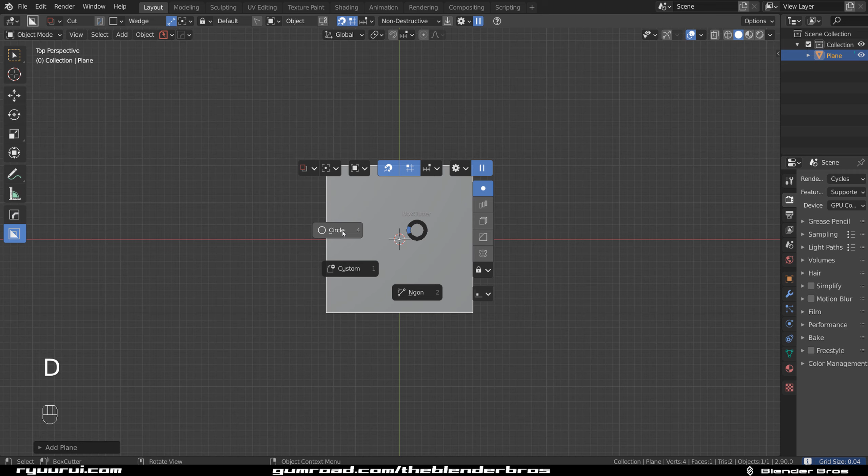So let's grab a circle and turn on this snapping tool here. Let's make sure we're in object mode, and then we can simply draw a circle. With shift and scroll you can adjust number of verts, and if that doesn't work, you need to enable shift scroll adjust for the circle. By the way, I'd suggest enabling those two as well, quite useful. Anyway, let's go here and see what we got.

Let's symmetrize this across, so Alt X and D symmetry, and let's combine these two faces and symmetrize it again and combine these two, and then we're done.

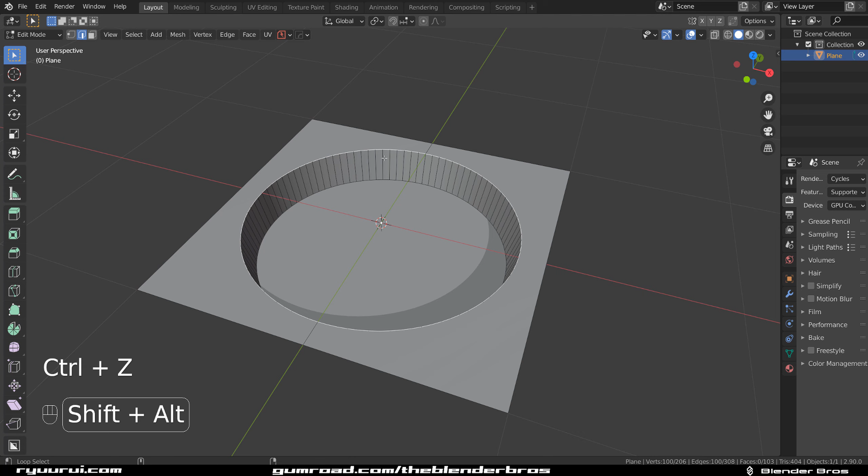Now let's extrude it down and scale it just a little bit, and we're gonna chamfer this because that's where it's hidden. Let's mark it sharp and chamfer this. We can't do this, so let's clean it up, there were some verts remaining from the previous edges. There we go.

That looks nice. Select this face, Q, and curve extract, and let's go up.

In fact, you know what, change of plans. What we're gonna do is create a blade. So deselect everything, go to view mode, and let's draw a blade here with an N-gon, like this. Hold Control - if the snap gives you grief, just turn it off and do it again. Hold Control and do something like this, and then we're going to create a shape.

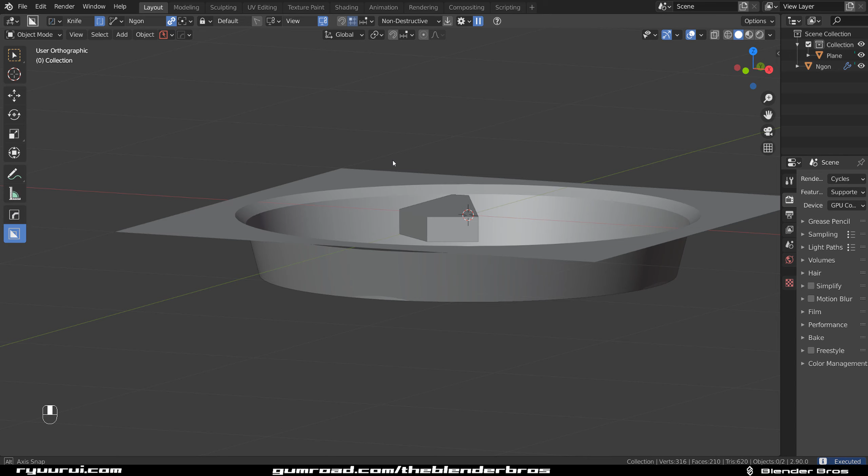Alright, let me see this. Let me move this a little bit further away here. And what we're going to do, in fact, you know what, let's extend this face out here. So in orthographic mode, just extend it out here.

Let's select this one, Shift D, P, and let's grab this and select over all of them, F, and then let's extrude it out. So somewhere here, Q, select this one and slash, and we can delete this. So let's remove this one.

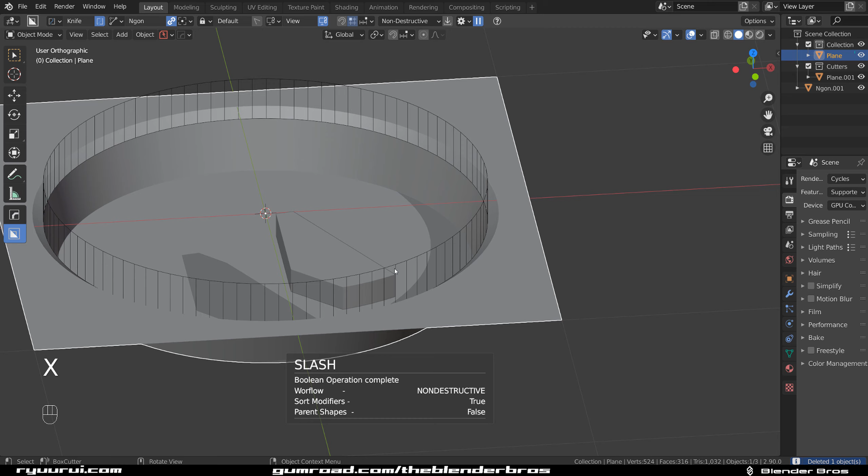Let's see here, we're looking good, so we can sharpen it. Now this is way too thick, right? So we gotta do something like that. And also we're gonna bend it.

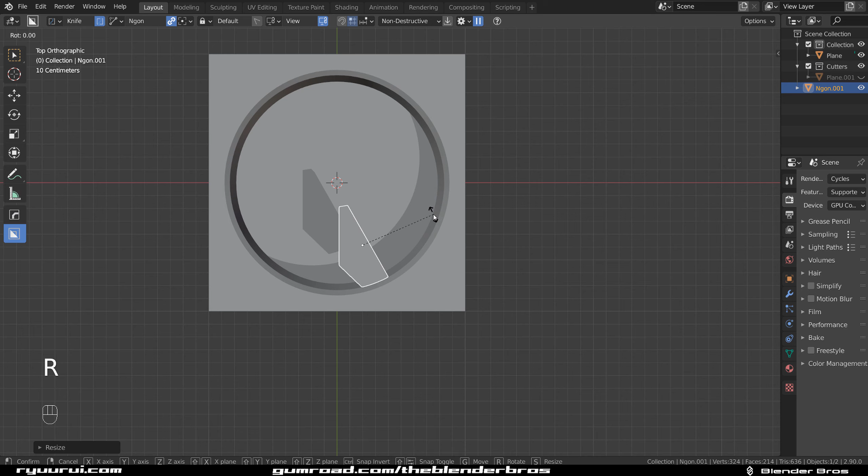So here's what we're gonna do. Let's rotate it on X by 90, apply the rotation, right? Let's go to Loco, go to mesh tools and dice, and press Z, Z and X, and this maybe is okay.

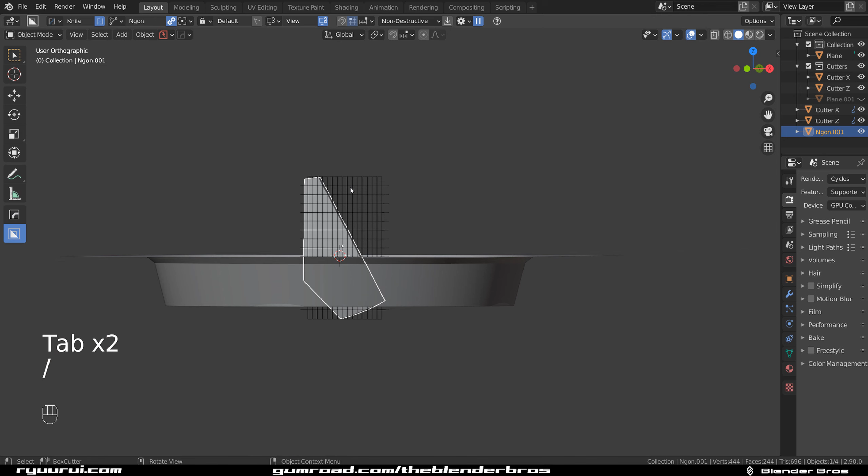Hold Shift and click - this will actually create a mesh out of dice, which you can use to do a knife slice at any angle you want. So if you wanted to slice or dice this not straight, but rotated a little bit, you can do it because you simply rotate the knives, okay? You align them with the geo.

So let's go to Loco again, select both of them, make it bigger, align them with the geo the way you want, which is important, and then your dice - oops, not this one - knife. And there you go, you can create a really nice quad mesh, or close to it, with this method.

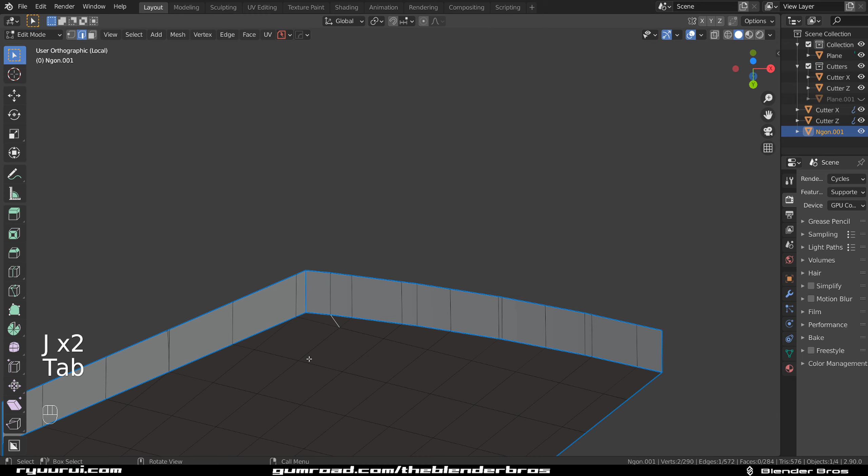Let's remove these because this edge is a mess here. We can remove this, and also this is way too close, meaning this will need to move. So move this one in here. Quite frankly, this one I would do something like this probably, and remove this one from here. And we can remove these - that's junk. I'm not concerned about the other side because I'm not going to be seeing that, but this should do.

Now what we could do is run the chamfer across this whole shape, or in fact not across the whole shape, but up to here, and chamfer this. But we're gonna get some grief from these edges here, so we will need to fix it first.

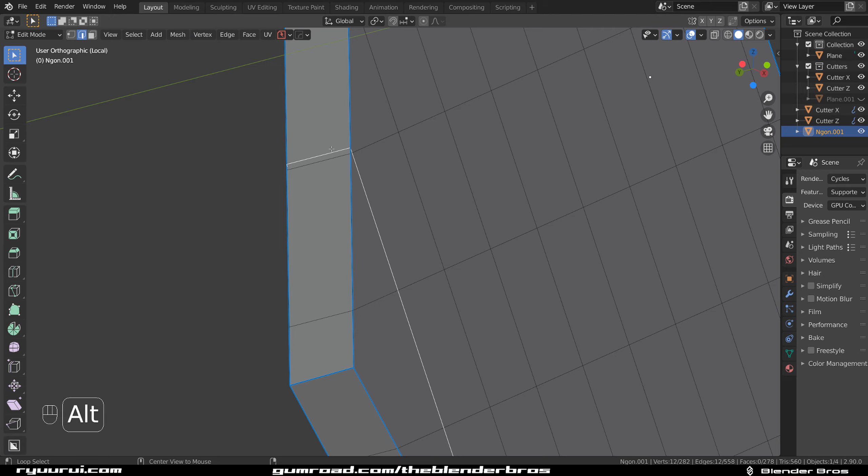Well, we technically could fix this, you know. We could even remove this, to be honest, and enjoy our life. So now it should work. And if it doesn't, we can always skip the bevel - I mean chamfer, that's not that important in this case. But you know, a small one would be nice.

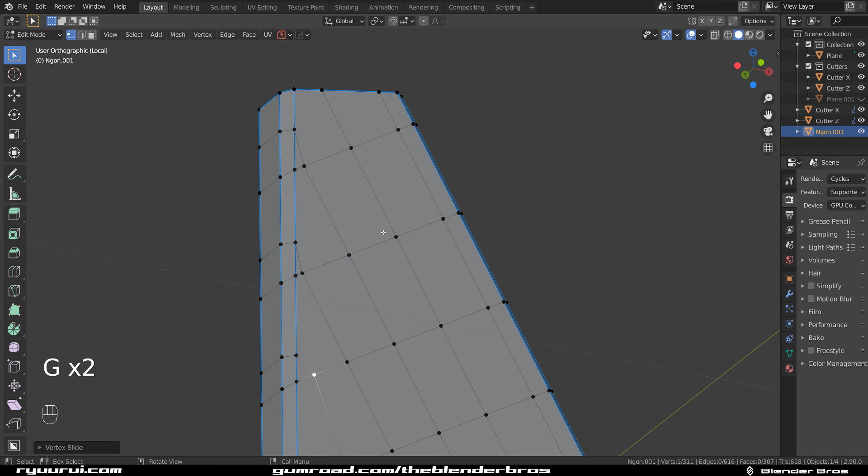How are we looking? Well, we're not looking too bad. Could be worse, could be worse. Well, this is pretty bad, but we can fix this. There you go. And this is pretty bad too, we can fix this. This one is a bit too close - too close for comfort. Okay, so we're good now.

Now we go into the formats. We go to Hard Ops and just click on this one. And what's going on here?

Sharpen got removed, there you go. Control and right click, and simply increase the angle a little bit. And there you go, that's that.

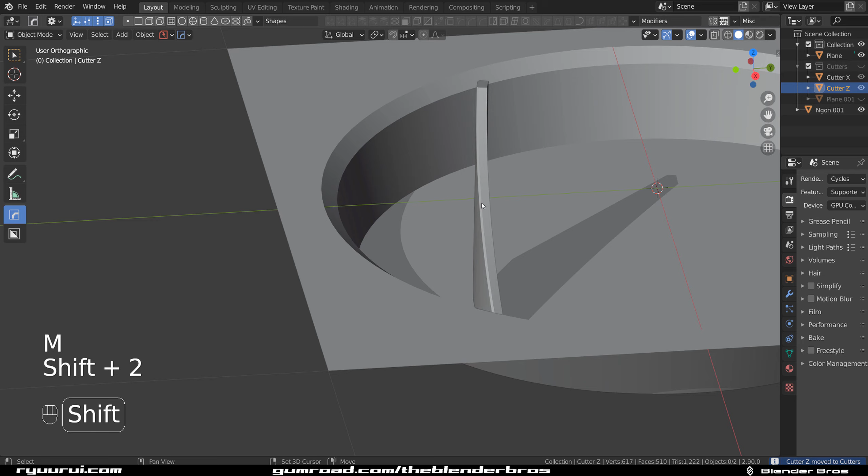So let's hide this, M to cutters, and shift 2 to hide the cutters. Let's now apply this to the mesh, RX minus 90, and apply the rotation.

And then we're going to control click on this array, right click on the array here, and increase the count to something like this. Now we're gonna have to rotate it.

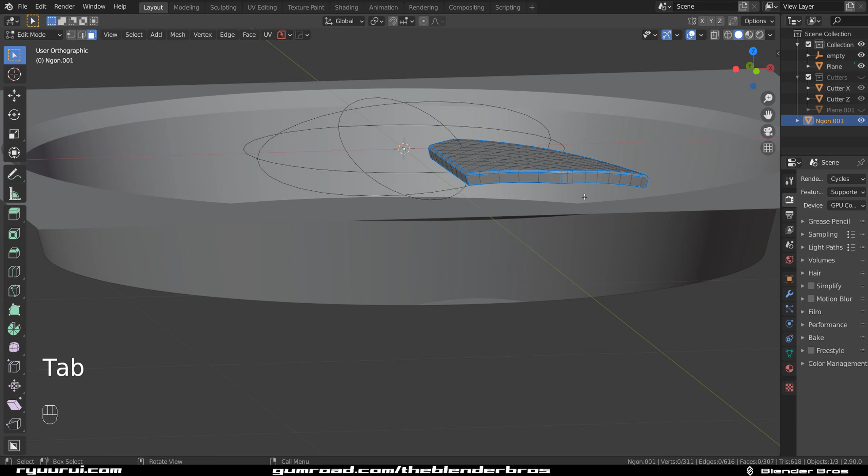Let's just move it this way, and then we're gonna rotate it this way, correct? A bit more. That's too much. There we go. That looks pretty cool, that's rotated, right?

So now I actually want to cut it, so it's gonna be a headache to do it with an array on. So I'm just gonna remove it and just array it again. And let's grab a knife, a bit gun is fine, and simply let's just slice this a bit.

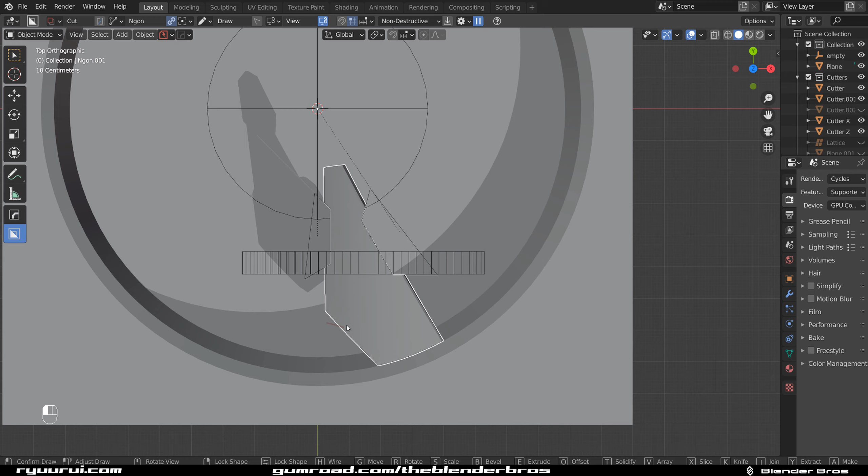Okay, so that didn't go through. There you go, this should work.

And not this one, let's just sharpen this and bevel. And you gotta be careful with bevel here because, you know, this is quite a sensitive geo.

So let's remove this one, this is from the array, and do it again. So go to array and let's just array this again.

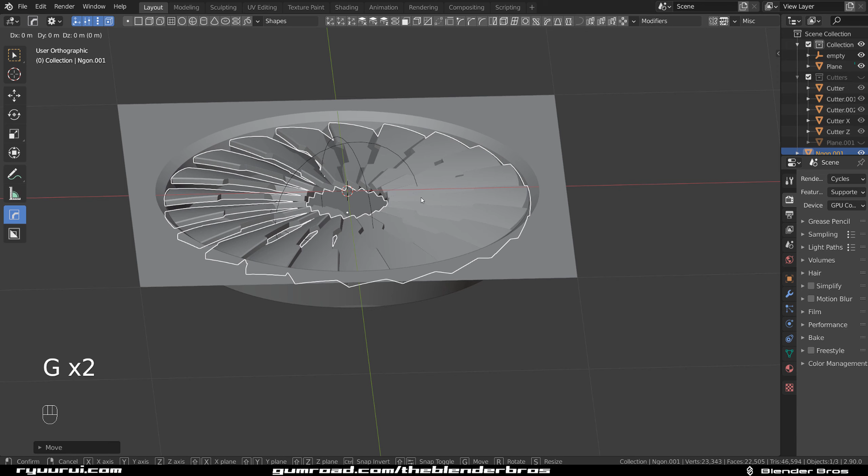There you go, and now apply. So everything is fine, so we can drop it a bit down, yeah, here. In fact, a bit lower. Somewhere here, that'll do.

And now we're going to select the face in the bottom and extrude it out. And we're going to grab this loop and drop it in here, and then in face mode, extrude macro, and insert it inside. So it goes like this, and grab this edge here and

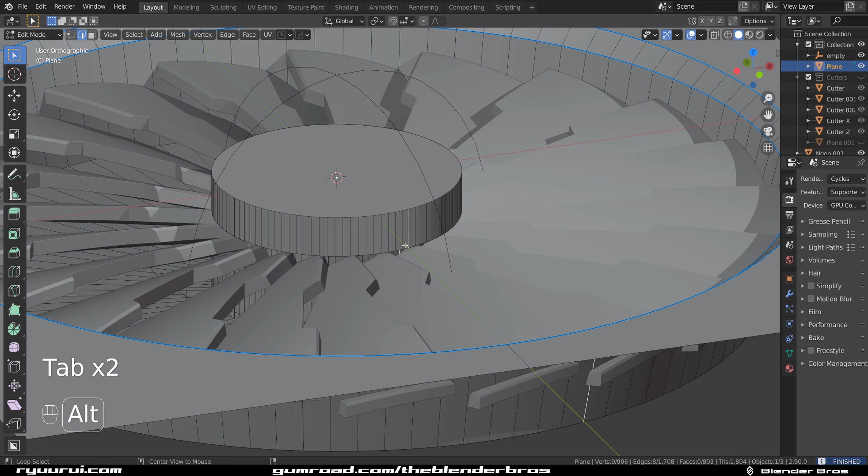chamfer it, and in fact we're going to run sharpen. So control shift click on sharpen to recalculate it, and that should do the trick.

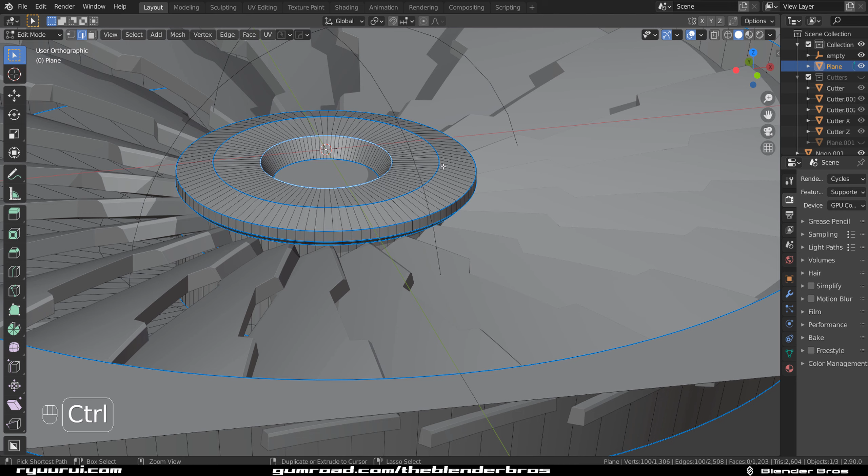So GZ, maybe something like this, and maybe we can do this, insert it and extrude it down, scale it, see if it's gonna be any better. Yeah, that's a little bit better, a bit better of a design.

So now we need some bevel on this one, right? So bevel this. It's a bit too crazy, so let's go with 9 segments. You want subtle bevels on decals, but that's quite important. Also, I think the bevel is overshooting here, or maybe it's not catching. So what we're gonna do is switch bevel from angle to weight, and done.

So that's that, and this one needs a bevel as well. This one does have a bevel. Okay, it's cool, it's a little bit too big, so I'm just gonna make it a bit smaller, yeah? Something like that.

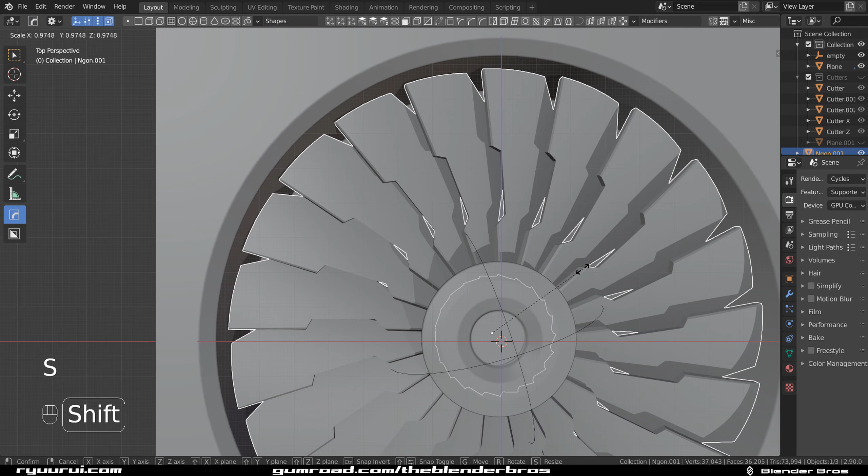Perfect, so let's save it. Now we need some kind of a, you know, it's actually still too big. There you go. We need some kind of a net or whatever on top.

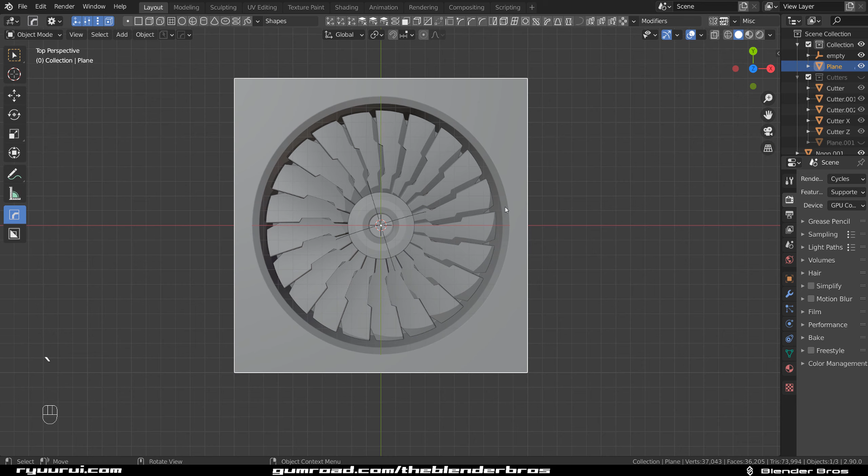So what we're gonna do is grab this circle, this one, right? And we're gonna go to hard ops and click on. We could grab a honeycomb from...

You know what we're gonna do? We're gonna go to edit and preferences and go to extra, not here, add-ons, extra mesh tools, extra mesh objects, this one.

And if I remember correctly, there should be a honeycomb somewhere here. Diamonds, extras, honeycomb, there we go.

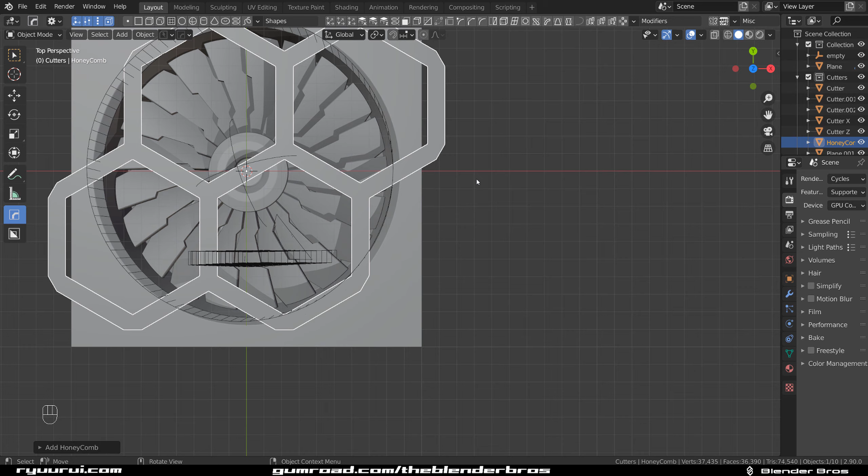So make it smaller, like this, or even smaller, and bring it in here.

And we're going to array this, right? So array this on this axis, right? So let's see. Okay.

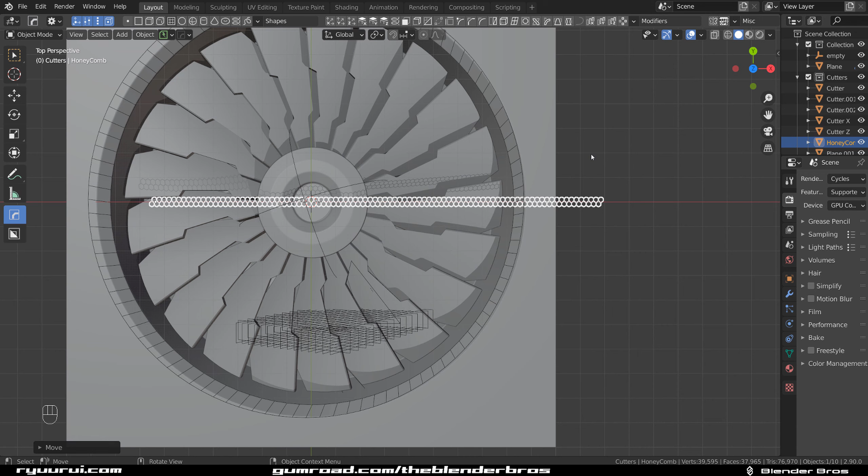Move it in here, and we're also gonna array this on the other axis. So press A to add another array, and you can add a second array with hard ops. So array this. Come on, what's going on here?

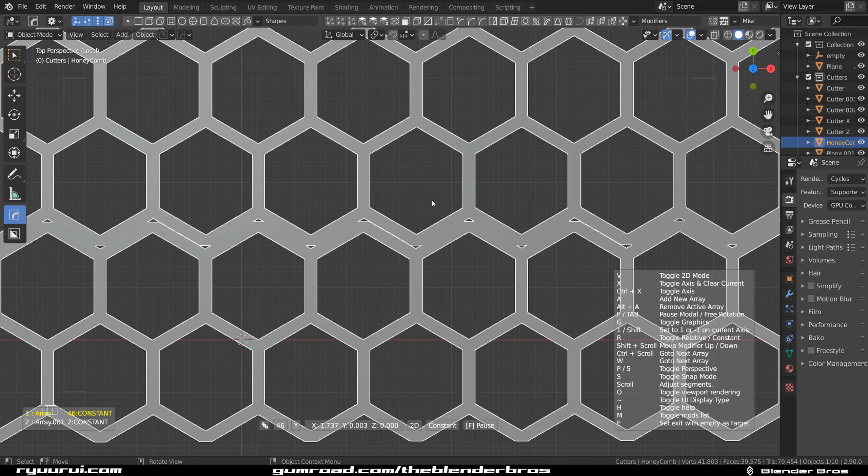One more time, this is confusing. Add a second array and X. There we go, that's what I want. Perfect, and now we're going to array this on this axis, right?

So make it big, and bring it back, and make it a bit bigger. And use this one to slice it. So boolean and slash, and delete it. Not delete it, wait a minute. Did it slash it? Oh, I think I need to, wait a minute.

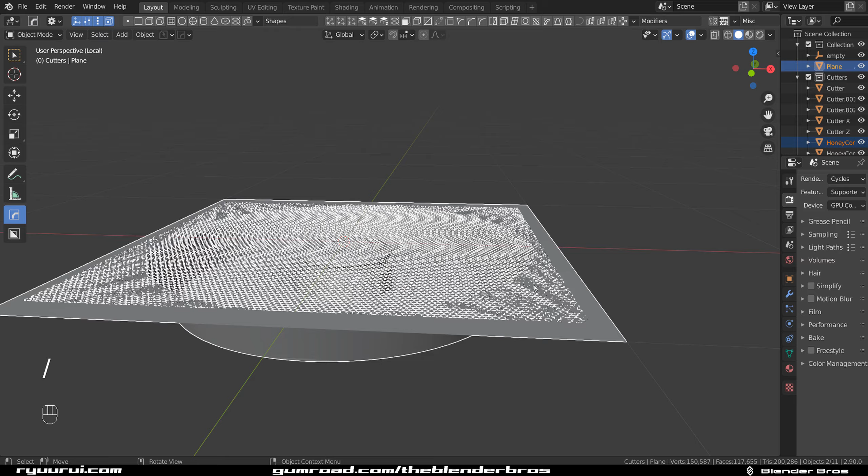Let's grab this one and remove the boolean, and let's apply all the arrays, and then let's slice it, okay? So let's grab this one. That should slice it, wait a minute. There you go, boolean and slash. There we go, now you're talking. And we're going to sharpen this, so apply the boolean.

Then clean it with MACHIN3, so just press 3, there you go. And we're gonna make it a bit bigger so it fits. Shift 2 to hide the cutters. Oh wait a minute, this went to cutters, didn't it? So we need to bring it back to the main collection.

There we go, make it a bit bigger. So, origin to geometry, and make it bigger and sink it in somewhere here. I'm going to select this geo, and what we're gonna do is, where is it?

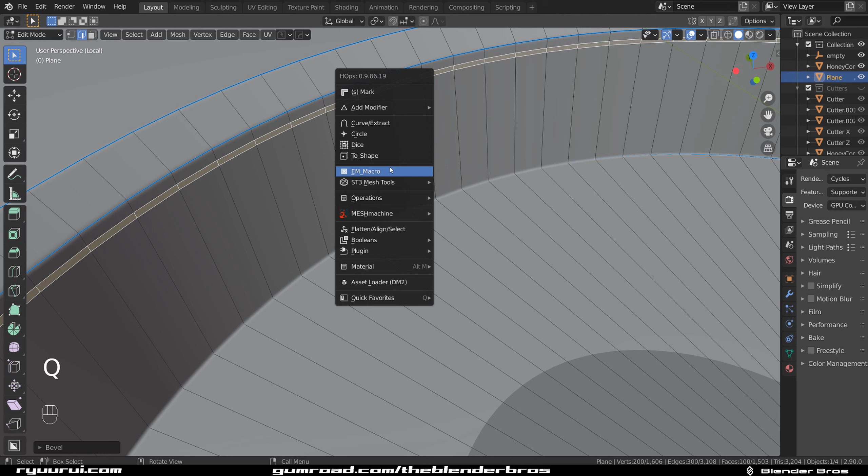Right, grab a loop and put it in here, and Control B and split it, and let's run EM Macro on this and move it a little bit up. One more time, move this a little bit higher and then split it. Okay, and then EM Macro and move it outside, yeah, like this.

In fact this could be a bit thicker, like this. EM Macro and outside, perfect. And now let's grab this thing, and where is it, move it a bit lower, right? Somewhere here, and we need to solidify this properly.

There you go, how are we looking? Yeah, we're looking pretty sexy. We're looking pretty sexy. So this could be a bit lower because it's clipping, you see. I don't want it to clip.

If your PC struggles, just, you know, you can skip this step. But I like bevels on my decals. I mean, you could just use some other kind of mesh on top of it. There you go.

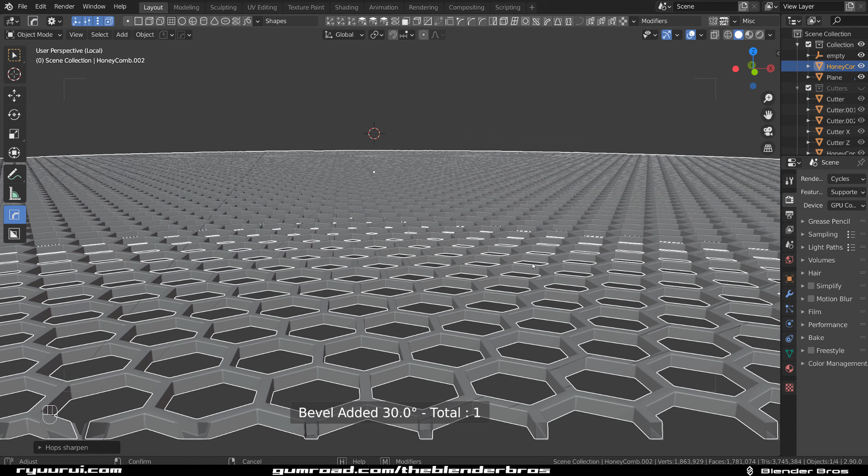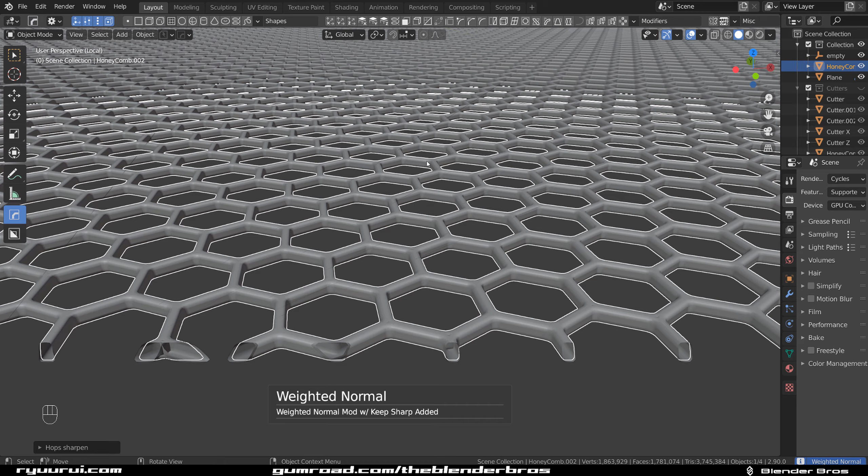So let's see, I think it looks pretty decent. Let's make it 0.001. And that will do. And weighted normals, and we're gonna switch it to 100. Affect it, and we should be good.

Okay, and then let's save this because reasons, and let's see how we're looking. Yeah, we're looking pretty good. We're looking pretty good. So now what we need is some, you know, outer edge or something.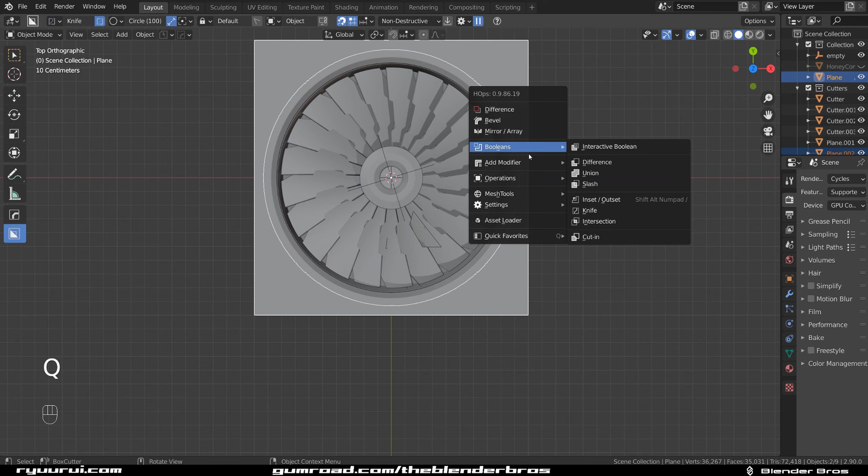Let's grab this one, Shift D, make it a bit bigger, and select this one and knife. Select this geo, and let's select this edge only and split it like this, and easy, and drop it down, and then switch it to individual origins, and yeah, just gonna work. Not really.

Okay, so what we're gonna do is select this edge outside and scale it in orthographic. All right, and select this one and scale it out. There you go.

That's better. Now we're going to select both of these and chamfer them. Sharpen. There we go, that's cool. What's going on here? Ah.

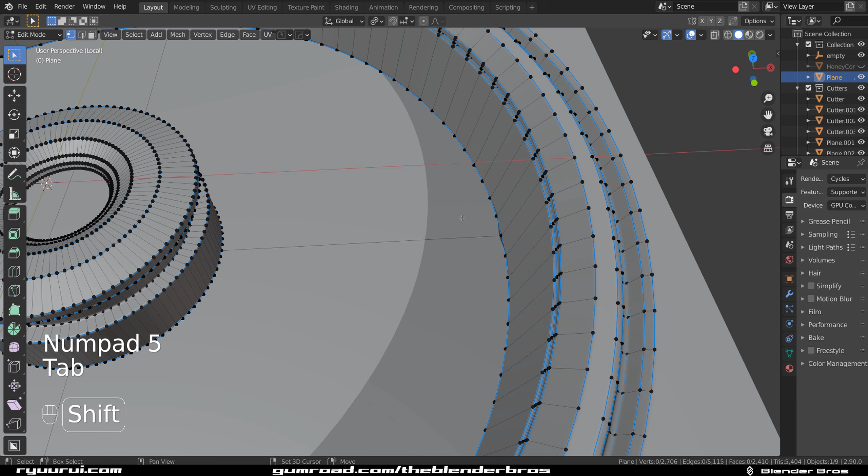Well, we can actually symmetrize it. Yeah, I'm gonna symmetrize it. So Alt-Z and symmetry, and boom. And this should work. What's going on here? Some disaster. Press 3 to clean it with MeshTools and we're done.

Okay, how are we looking? We're looking pretty good. Alt-H to unhide it. Shift 2 to hide the cutters, and let's see how we're looking. Yeah, we're looking pretty good. We're looking pretty good.

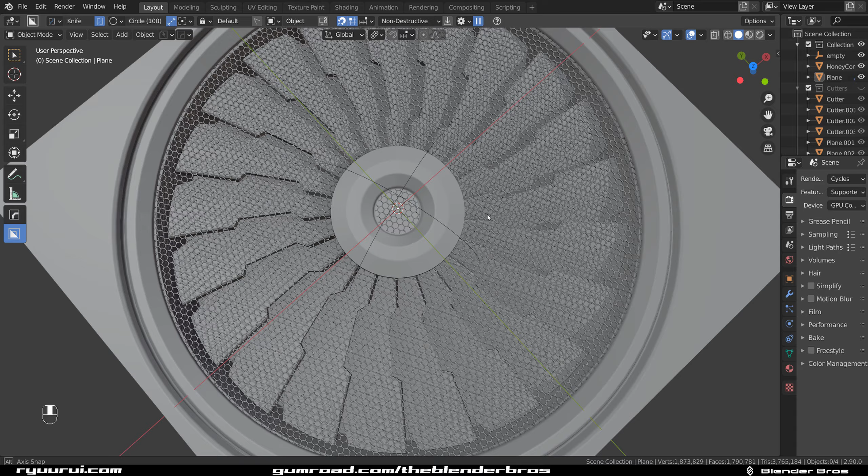So I think this could do, but you know, we could just add some more stuff in here. For example, let's grab a plane and rotate it and subdivide it.

And just, you know, bend it a bit and apply the rotation. And let's curve it a bit more. And let's bring it here and see this curvature.

Let's actually add some solidification so you can see what we're doing. So modifier, solidify, there we go. And now right click on this bend and, you know, bend it properly like this, right?

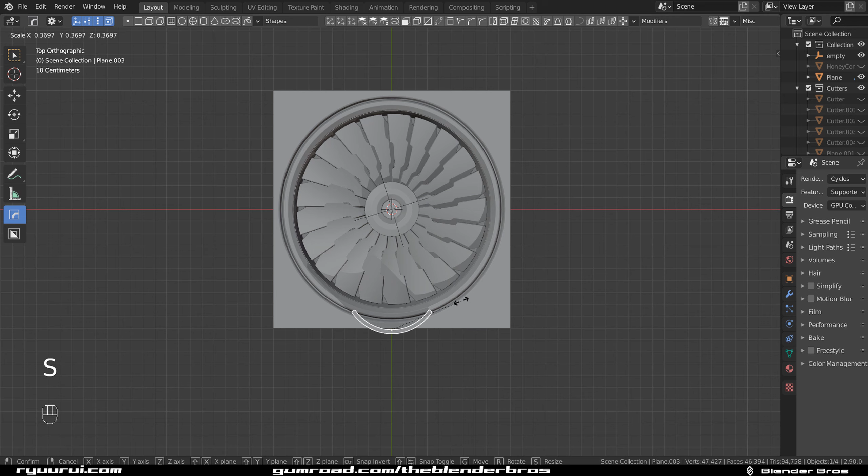Perfect, and make it smaller and move it in here, and bend it some more. So let me see this. It's a bit too much. Something like this would do. Make it a bit thicker.

That will do, maybe not so big, but we're going to apply Smart Apply, and we're going to sharpen this, and we're going to apply some bevels on the ends, right?

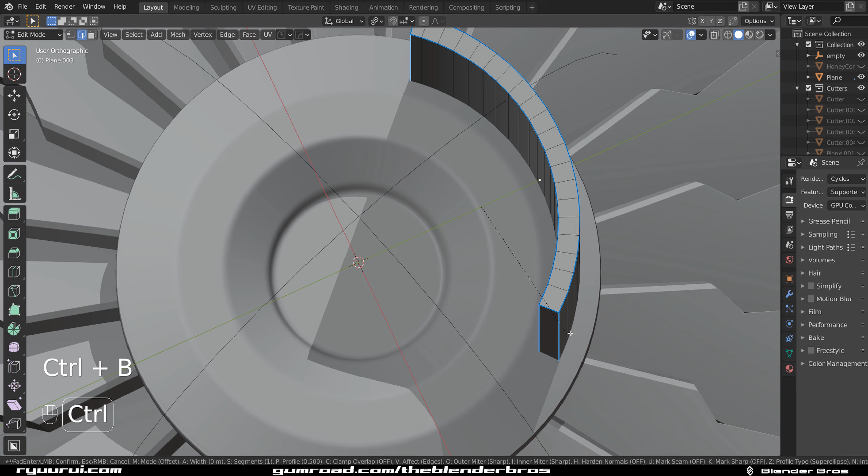Okay, and then we're going to bring it up and slice it. Difference. How are we looking? Well, it's too deep, but looks pretty cool. Come on.

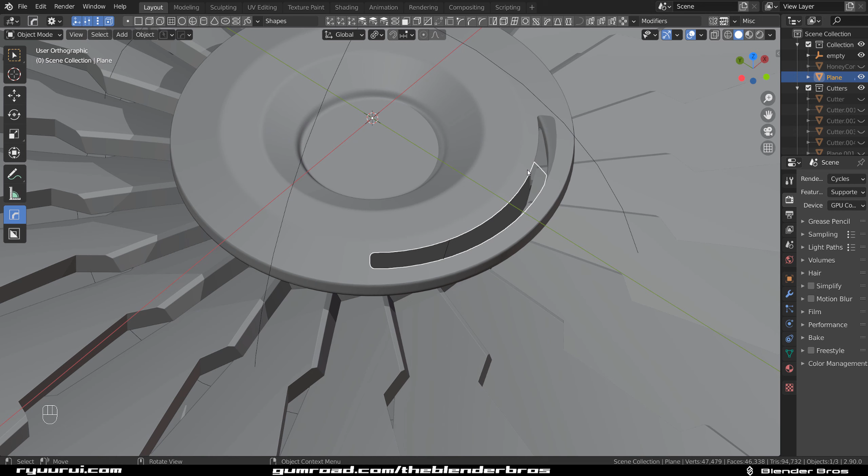One more time. And GZ, move it up. Let me see this. The reason why this boolean doesn't actually work properly, there's a gap in here you see, is because this geo is not manifold, meaning there is no closure underneath. We need to close this geo like this, right?

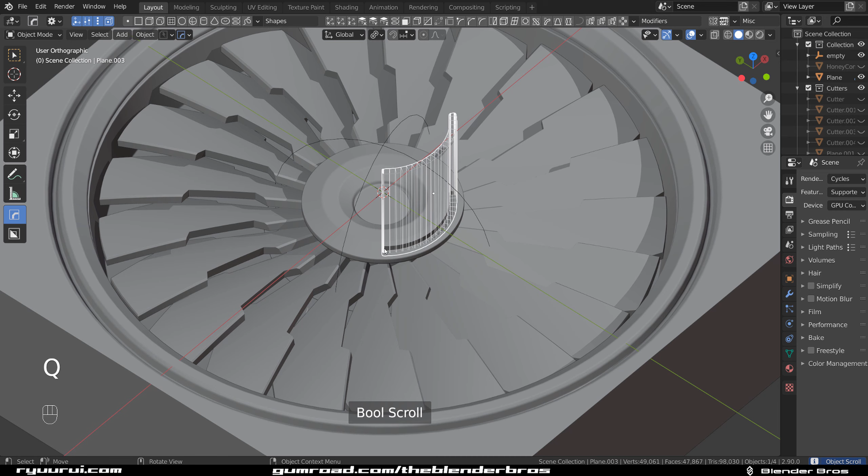And now it's gonna work. So GZ and move it down. How are we looking? Looking pretty good. So we're going to copy this to the top. Not a symmetry, but reset mirror with X, and there we go. So now we're looking pretty good.

And we can actually apply this. So operations, smart. So we need to sharpen this, and this is gonna be okay. And then this is a little bit too close. Run something like this, right?

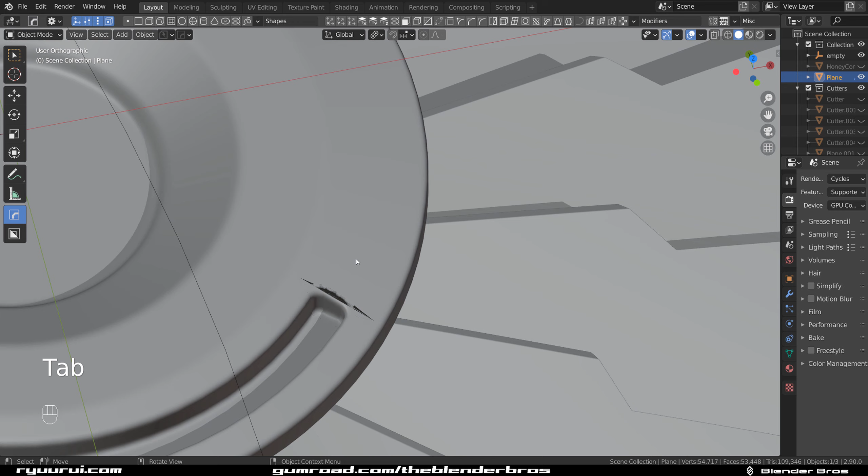This would also work, so I think yes, this is what we're gonna do. Don't go too shallow on the angle, because you're gonna have problems with shading. The bevel is too high, too crazy I think. Let's make it a bit smaller. There we go, all right.

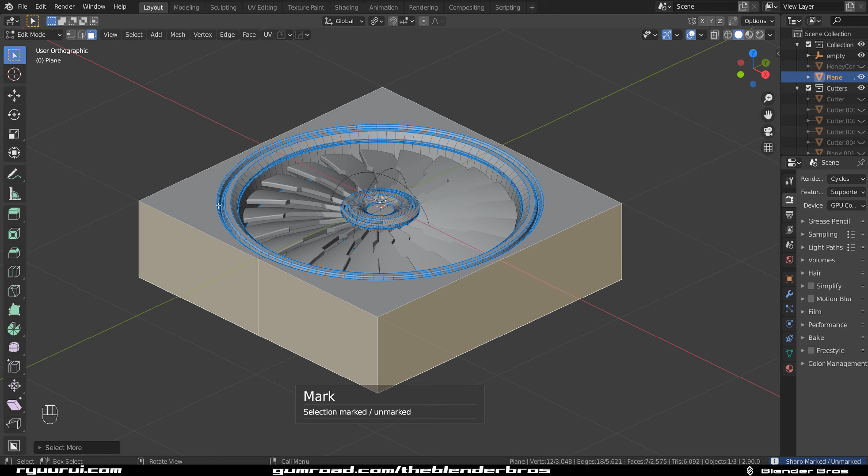So now what we're gonna do is select all these and unsharpen this, because we don't need this edge on the rim to be sharp. Select this one and delete verts. And we're done.

How we looking? Let's grab these ones to cutters, yeah? Not collection, cutters, there we go. And this one too, we don't need it here. Grab it to cutters. Looking pretty peachy, looking pretty peachy.

I like this, I like this. Well, we could leave it like this, you know. We could still create some kind of screws in here, or not. So if you want to make it a bit more complicated, we could.

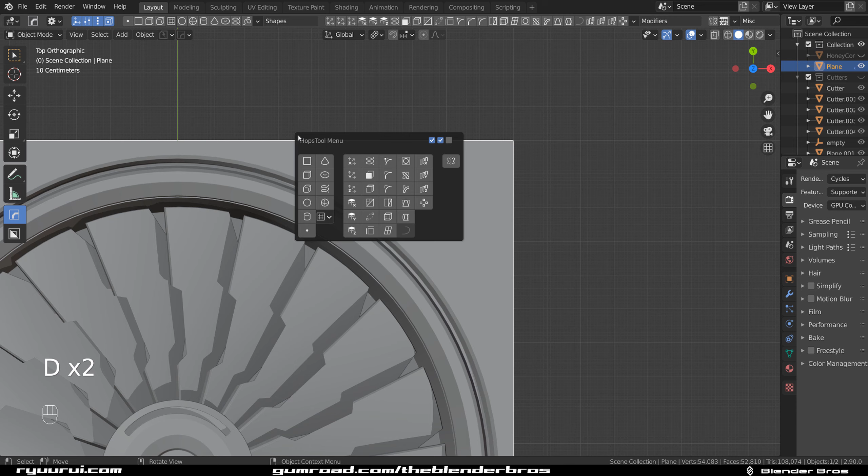So for example, what we could do is grab the box from box cutter and go to line box here, and create something like this, okay? And then extrude it down. And if it doesn't create a wedge cut, just press W.

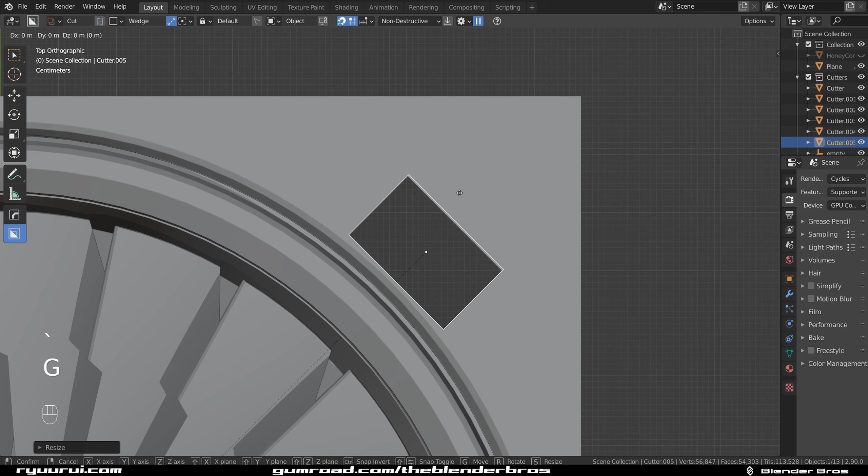And let's bring it to live, because I want to adjust it a bit. Let me see this. Let's make it smaller, and smaller, but Shift Z. And bring it somewhere here, like this, maybe.

Make it a bit smaller. And bring it closer here. There we go, that's what I want. That should work perfectly.

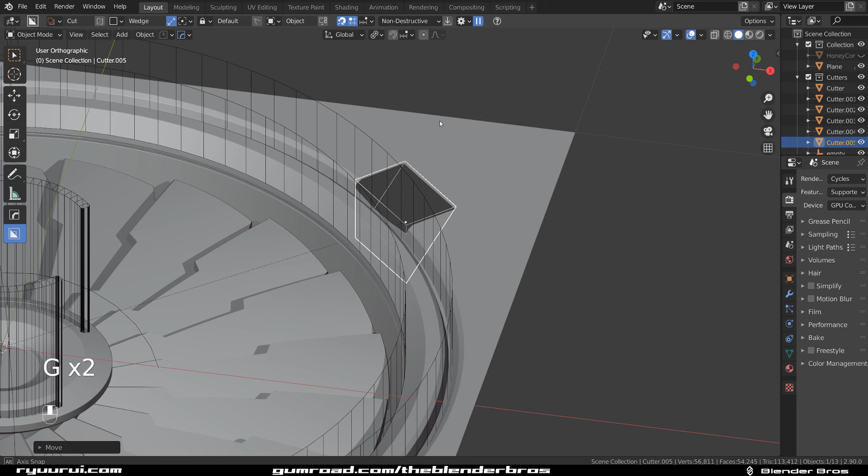Okay, and we got the same problem here, right? So if you want this boolean to work, you will need to do something like this again. And this should work. Let me see how it looks actually.

So this one is actually too deep, you know. So G Z and just move it up a bit, yeah, something like that. And this should do. H, how are we looking?

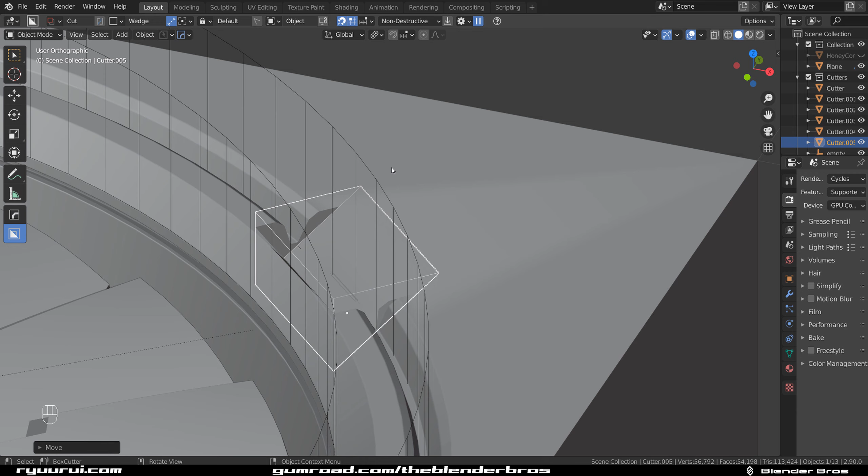Well, it's not amazing. How about we make it deeper and move it, move it here, like this, over this one, like this, and make it a bit deeper, and solidify this maybe.

Hey, this could work, and we could actually bevel these edges, you know. So something like that, but maybe not so deep, maybe somewhere here.

And now let's align this with this corner a bit better, and then click both, reset the mirror, and hold shift and just copy this across the shape.

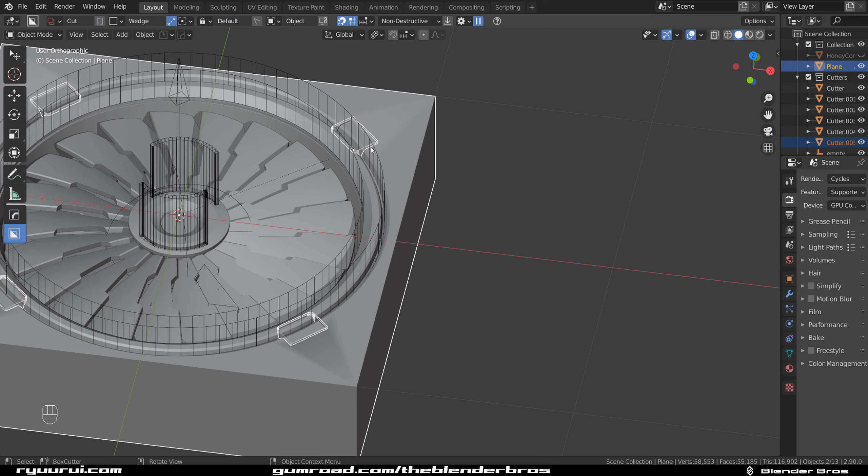Looks pretty good, and let's sharpen this. This is gonna create some nasty issues. Let's see what's gonna happen in here, see what's happening in here with this mesh.

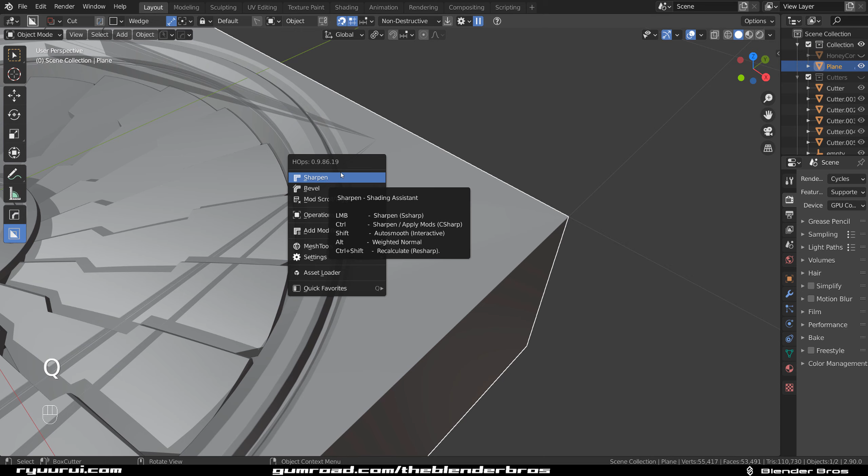We should be fine. Let's apply the operations and smart apply. We're gonna have to apply sharps in here manually, right? So let's recalculate sharps. And we got some bevel overshoots in here. So what's going on here?

This one is causing issues. That's one. Let me see this.

These are too close. And these are too close, I think. The rest is fine. There's some problem in here too. What's going on here? There's some problem in here. I think double verts, but where? I can't see them.

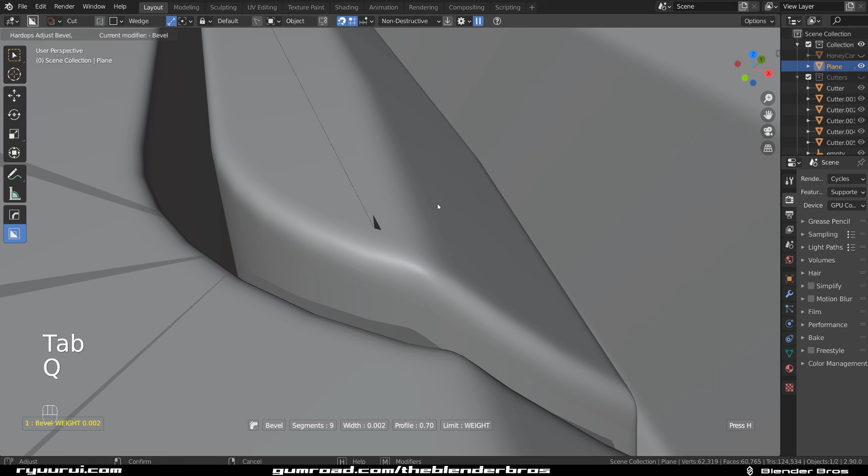Let's just increase the view distance because I cannot get close enough, so the clipping is just too close. There we go. I think it's just the bevel size basically. Yeah, it's just too big of a bevel. It's literally breaking.

The rest looks fine. Maybe a bit more, a bit softer, something like this.

And now we can symmetrize it. So D, symmetry, and symmetry across, and we're good to go, I think.

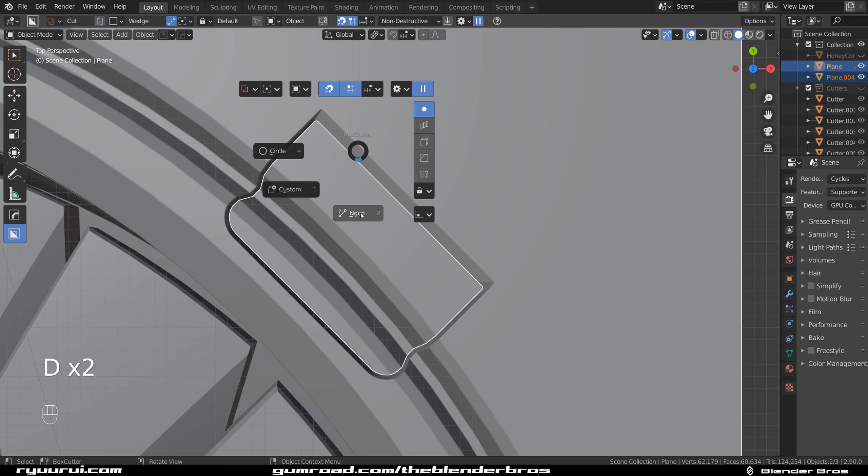What we could do, right, is select these to their own selection. So Control L, and we can create some kind of illusion of a clip or something with which you could just detach this fan, right? So something like this, you know.

Oh, we need to be in orthographic mode. Let's try this again in view mode and orthographic. Let me just cut it like this. There you go.

So let's copy this across, or even, you know what, we could just align it manually. I can't be bothered with mirrors here. Let's grab this shape and not bevel. Let's sharpen this and let's chamfer these two. Okay.

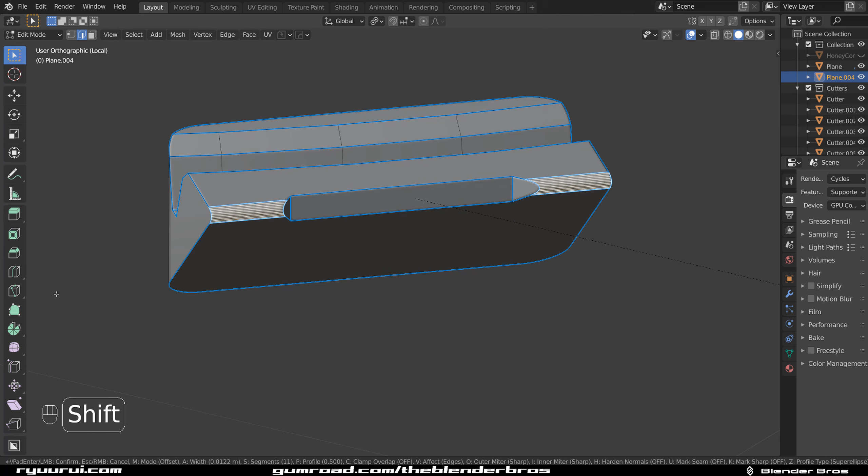Well, in fact, we could just round them up. This could be actually a good idea. Yeah, nice, I like it.

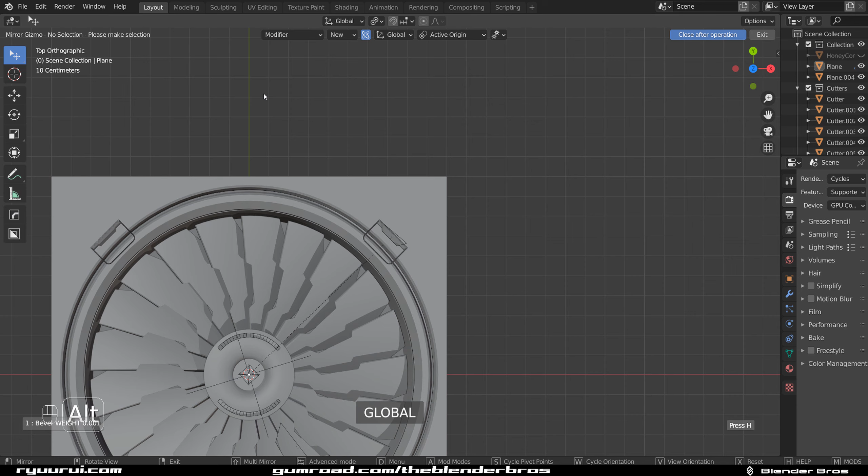So now what we're gonna do is simply select this one and symmetrize the cross, holding shift, and then you're gonna grab this one, reset the mirror, hold shift, and mirror it across, and you're done. So let's see how we're looking, and hide this modifiers, the cutters.

Let's Control plus this and unsharpen. And then let's select these faces and simply delete verts. Then what you want to do is make sure that this one actually has weighted normals running on it. It doesn't, weighted normals, and you want to set them to 100 and bevel to affected. And here, we need to manually apply these edges.

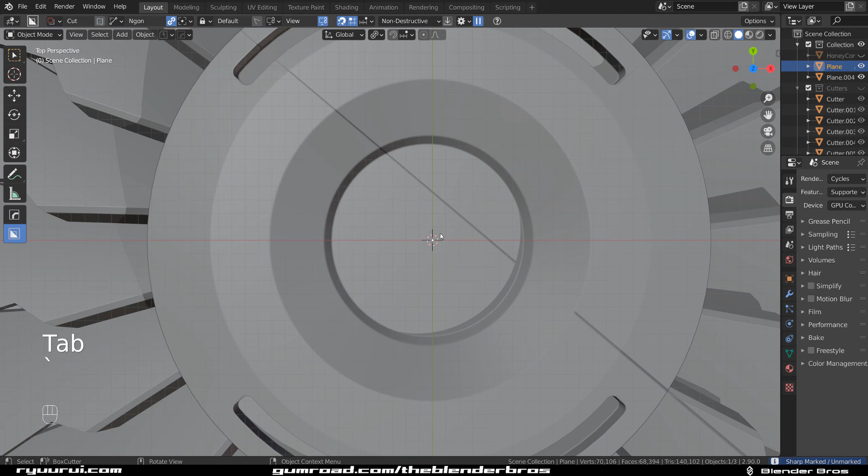Otherwise it's not gonna work. Okay. And in the very middle, what we're gonna do is combine this into one face.

Let's just drop it down a bit. And what we're gonna do is drop an insert, okay? This will do. Go to KIT OPS, so Q - actually we can go here, and I prefer this menu.

I don't know, it's just, I guess I'm used to it. But you can access this through hardops - hardops inserts, that's what I want, and I want this, and insert.

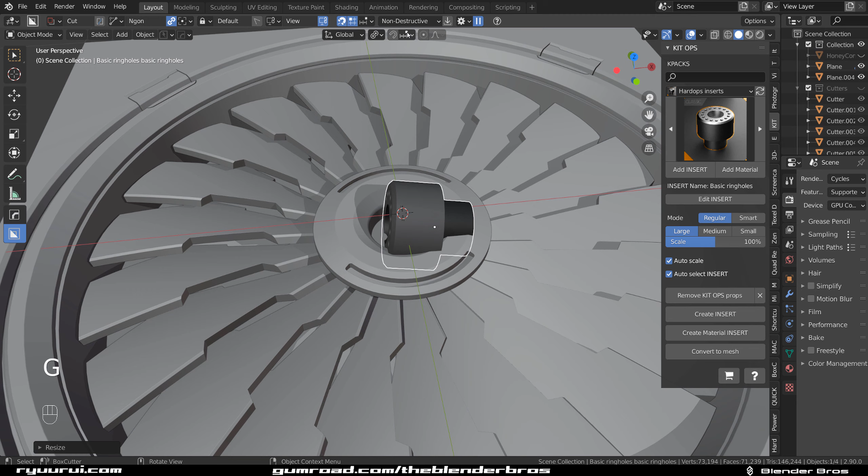And if control snapping doesn't work, click on face and align to target, rotation to target, and this should do. There we go. Then geo to cursor, make it smaller and sink it in a little bit bigger.

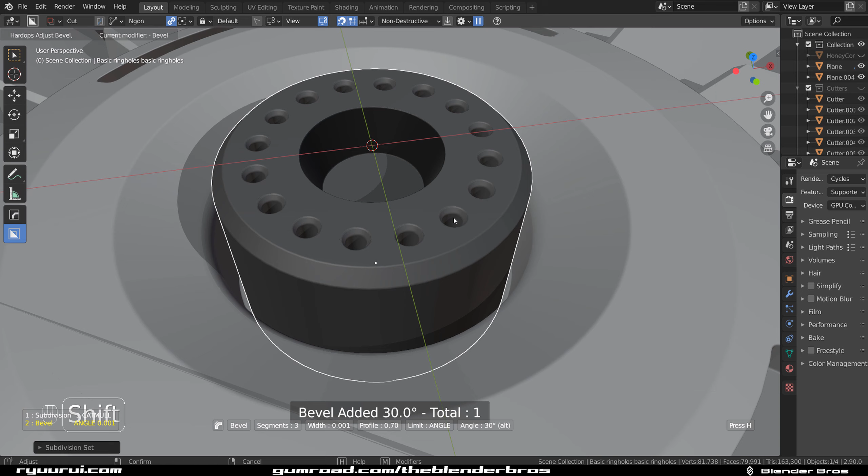And also I'm going to apply one level of sub D and bevel, because it has to be smooth, a little bit bigger. There we go. And remove all the mats because we don't need them.

Okay, now we could create some kind of lighting or something. For example, here in the middle, we could do something in here. So let's select all these faces and...

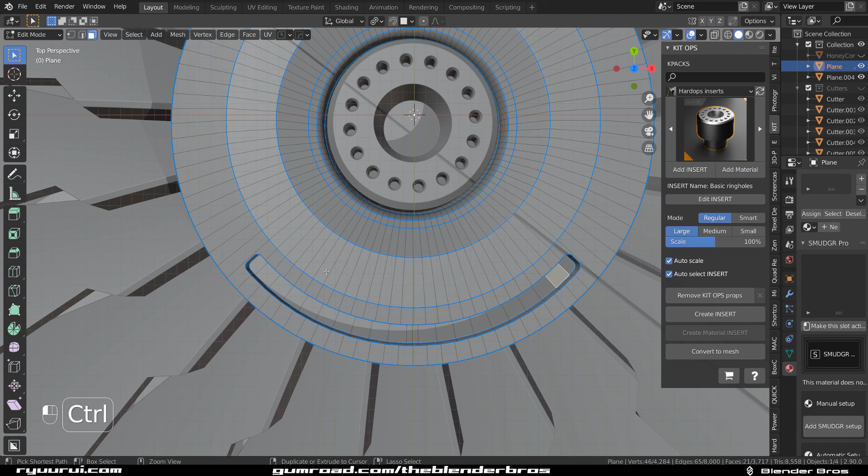Let's insert them. Come on. In fact, let's just grab these, the rectangular ones, and insert these. That's better, nice. And let's drop it inside a little bit.

It works. So now we need some mat here, and then we need another one here, right? So plus, and let's make it new.

Then change to emission and change the emission to something, like this. Increase the strength, and then we're going to assign it, and this should work.

Perfect, so there you go. And let's go back and Alt H. Okay, and save it. I think we're done.

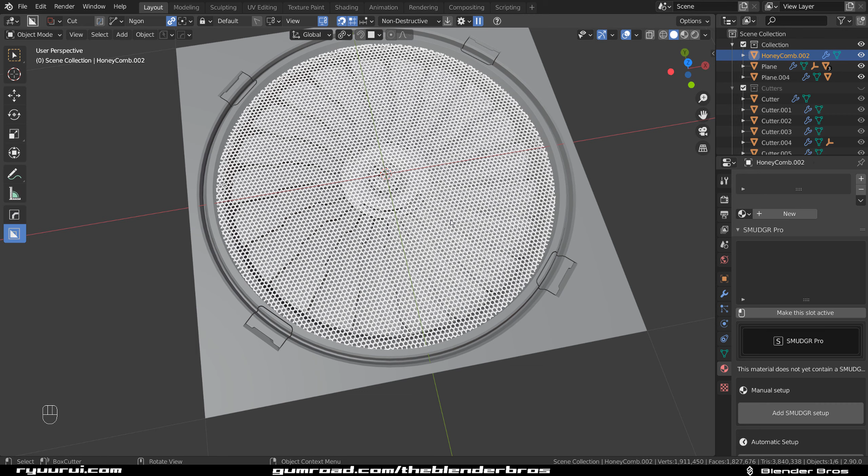Pretty cool. So what we're gonna do now, right, is we need to combine them. So we need to check if all the modifiers are applied.

You need to apply this bevel, because if you combine two objects with a different size of bevel, they're gonna get merged and one of the bevels gonna get assigned. I'm not sure which one gets assigned first, but it's just gonna be a bloody mess.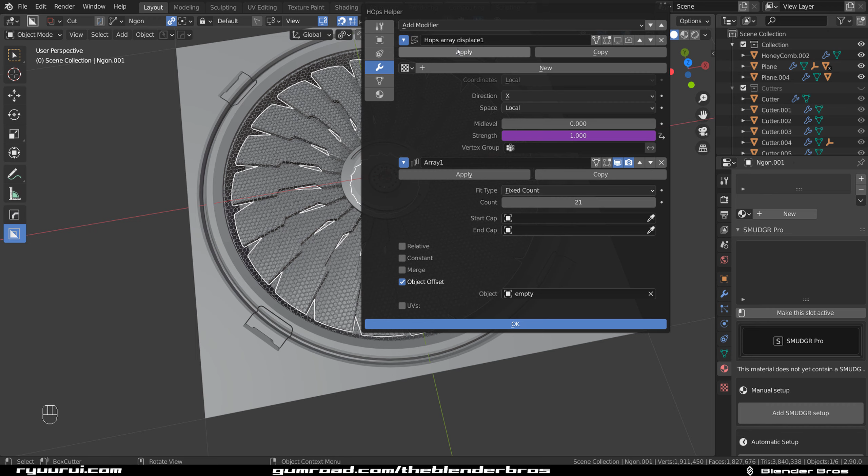Weight normal, it's fine. So we're going to combine - let's apply this one too. And oh yeah, the displacement is a bad idea.

Let's just go with the smart apply - smart apply is the way to go. And this one, bevel 2, just apply this, and this one too, bevel, apply this, right?

And the mirror too. So, oh yes, we need weighted normals on this one, 100. Now we need to think which elements to combine together.

Like these should be together, no brainer. This could be a separate element, right? The one inside.

The interior could be combined with this one, right? So this net could be combined with this easily, right? Okay, it's gonna take a time to merge them.

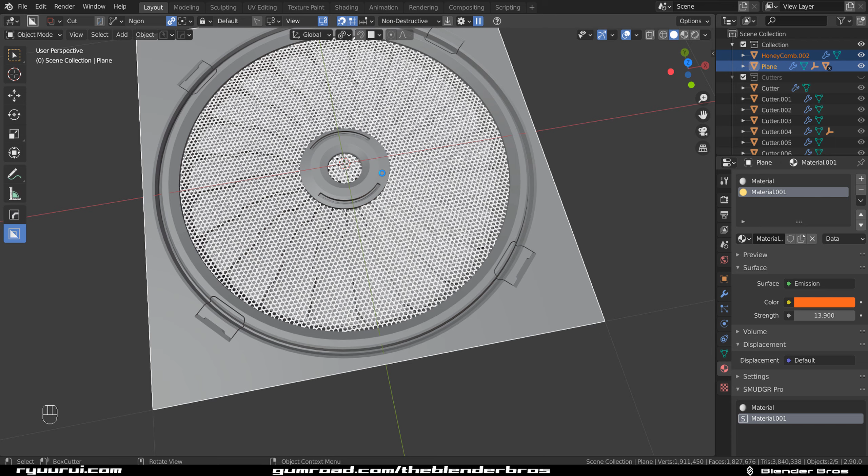And then we could combine the middle with the blades. Yes, we need to cut this middle of this net though.

Let's go to local and let's Shift D this cutter and make it smaller, and we're gonna have to cut this one out. Alright, like this. Okay, and make it larger and drop it down here and select this, and difference.

Okay, I think we're good to go. So let's save it again. And now we combine this one, which shouldn't have any.

Right, let's apply the subdivision. In fact, let's apply the sub D and the bevel. And we can apply weighted normals at 100.

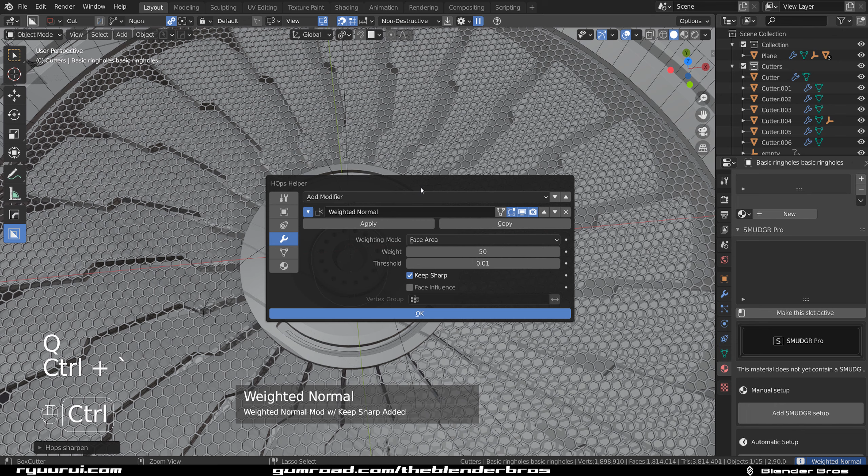Come on. Okay, are we looking? We're looking good. So let's grab this one.

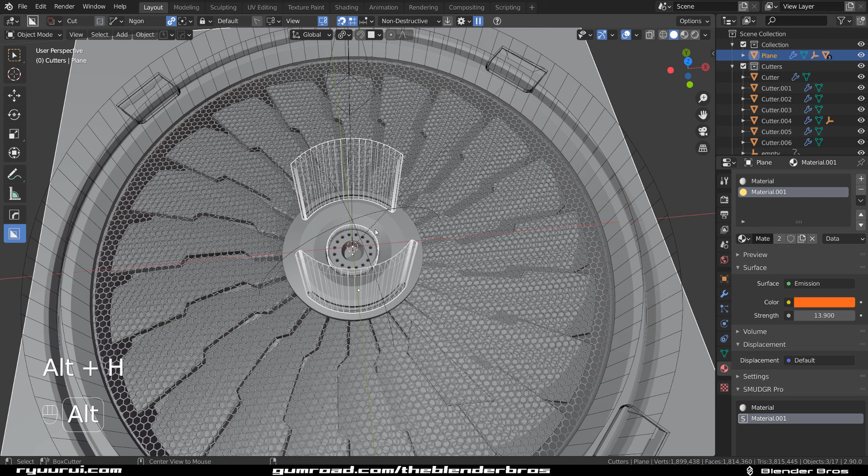In fact, let's just hide this. And not this one, this one. So, oh - this, wait a minute, wait.

So this one has to go with the background. I mean, it was the main thing. And this, the blade inside, could be a different color.

There we go. So select the blade, select the outer part, and I think that's everything. Yep, and we can bake it.

So let's go to DECALmachine. Let's make a test bake. We have emission, so we need to select it, right?

So by default it's deselected, but you can actually save preferences. So I have it saved that, you know, it's anti-aliasing 2x, 512 because I like to run a test bake and bake emission on. So you can set it up like that and just save preferences, you know, here.

Right, so let's just bake this and see how we're looking. Alright guys, let's see this.

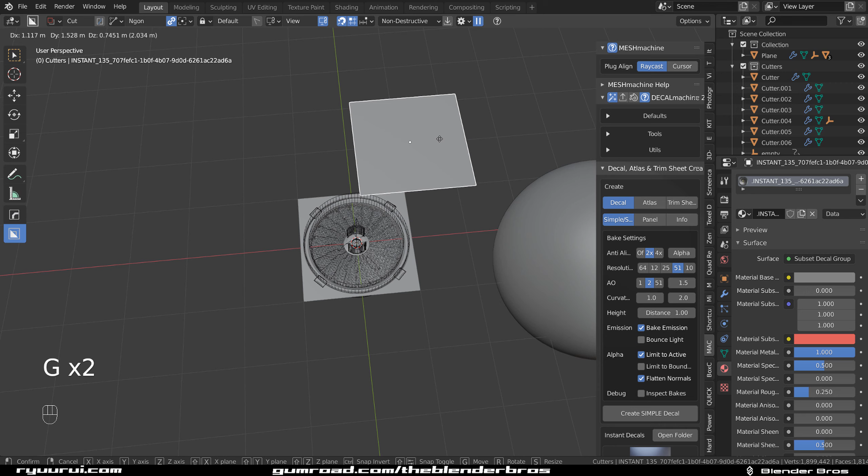So the way I do it is I select this decal and usually I Shift D it, but in this case I don't have to Shift D it because it's just a 512 version.

Now what you want to do is make this sphere bigger and control it so it's a bit more smooth, and then you just drop this in here.

And we're gonna test it, right? So D, then W to get out of the box cutter, Alt, project, then D and hold Shift and adjust it a bit. Go to your LookDev mode.

Let's just bring it all up and see how the shading looks. Yeah, it looks bloody awesome. Look at this beauty. So yep, we're looking clean.

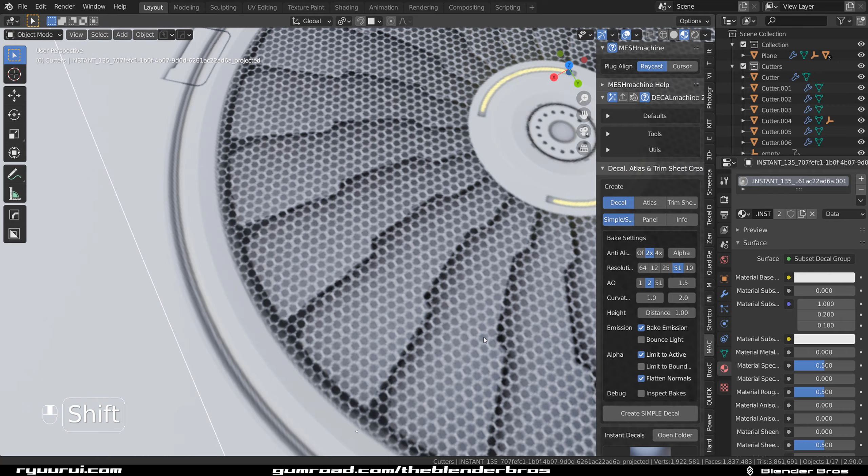See, now there is no pulling on the edges here, and the geo is not being pulled because it's actually been physically inserted into the sides. Now we're ready to bake this in the high res, easy.

Now what are these, I wonder? These four, that is weird. Let me check this very quickly, because that is weird. Let's just grab this and see what's going on here. It's probably these. Okay.

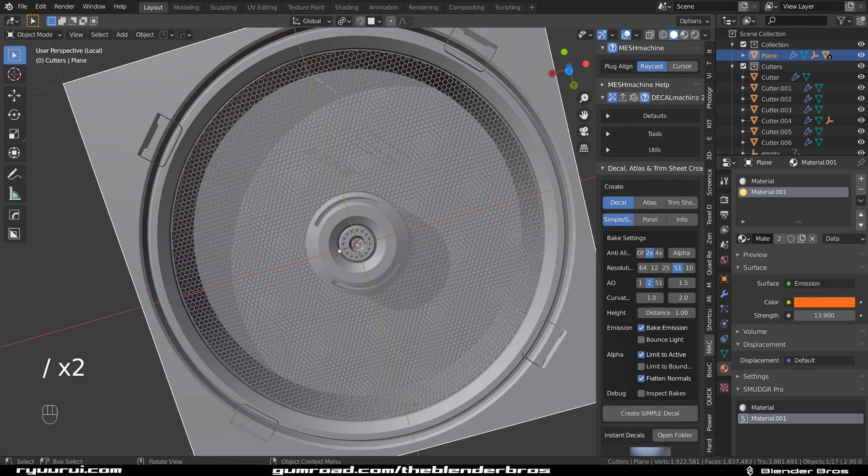Tell you what we're gonna do. This is gonna be tough to fix because of how dense this geo is. However, we could do something like this: select this one, Control L to select everything, go to top view orthographic, and simply scale this out.

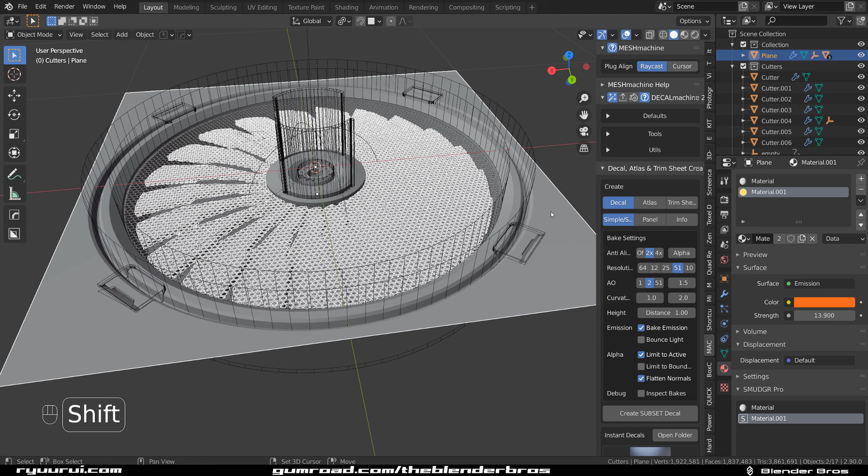Alright, let's bake this properly now. So let's select the blades and then the outer part, and then let's bake it properly. It's gonna probably take a few, because, you know, 4 million. So I'm just gonna press bake and see you in a few.

Okay guys, looks like we baked. So let's see this one. Now I'm going to Shift D it, okay? The reason is I'm gonna be adding this one to a library, so I don't have to rebake it. Because you don't want to move the main baked decal, otherwise you cannot add it to the library in DECALmachine. So let's go here and see.

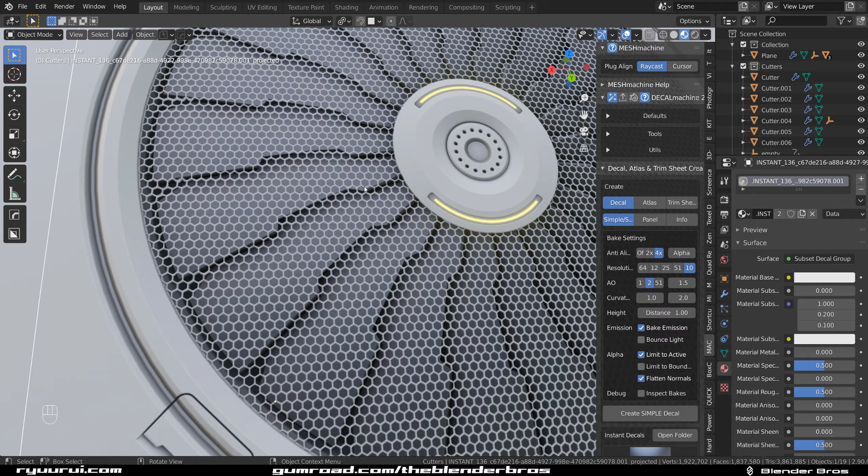Yeah, it looks really beautiful. So let's adjust the parallax. So D, and let's bring it to the top and then drop it a little bit down. You gotta be very careful with geo like this, because this is extremely sensitive.

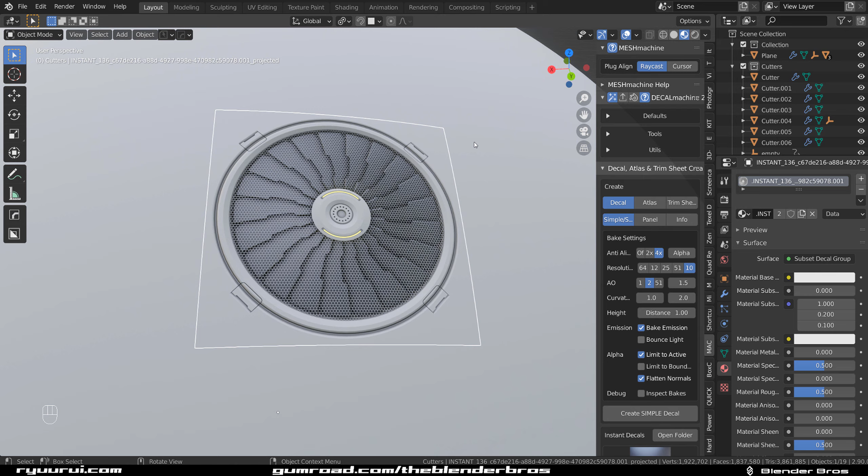This is a situation here, because it's baking. If you pull it down, you see it's gonna pull down to the blades. So you're gonna be very careful with the parallax here, but it looks extremely beautiful, very clean. So let's grab this and let's go and edit.

I can actually show you these vents if you guys want, if you're interested. So let's pop it on a proper color, let's just drop some color in here like this. Now let's pop this vent on. So let's go here and pop it on and see how we're looking.

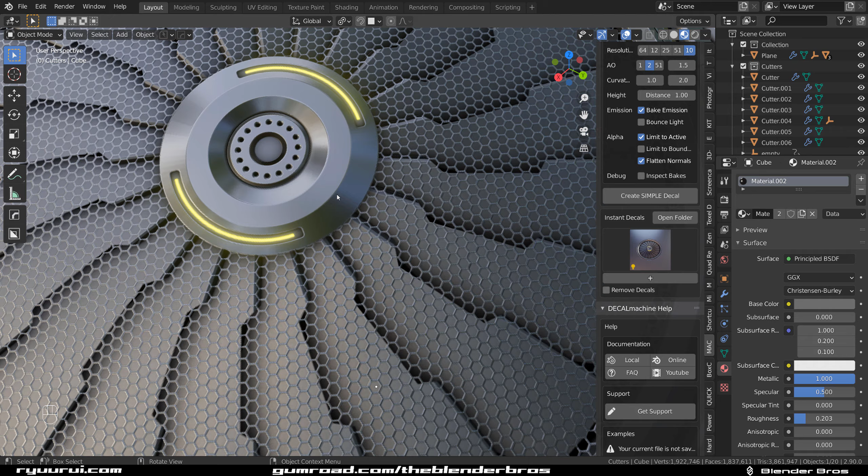So let's project it and let's adjust it. And how are we looking? Yeah, we're looking bloody amazing. Look at this, looking bloody amazing. Extremely clean, beautiful. That's beautiful.

So we're gonna go, guys. That's how you create complicated decals in DECALmachine with emissions.